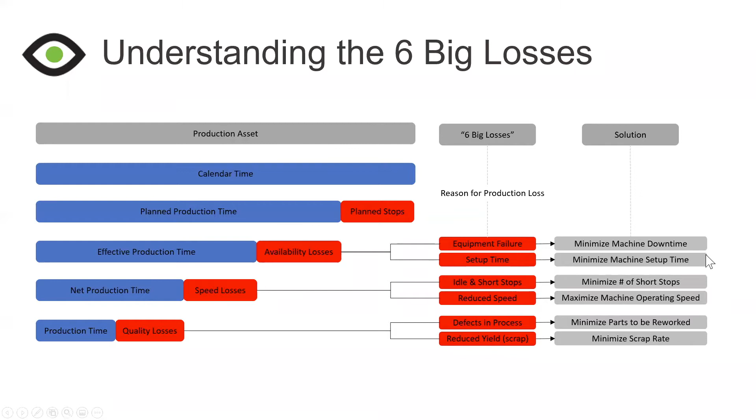And as we continue to analyze this from more of a 50,000 foot overview, the kind of natural solution here to these losses would be things like minimizing your machine downtime or minimizing those setup times. And how we're going to do this as it relates to Prophecy is really to focus on these. So as you'll see in a little bit when Ron starts giving this demo, Smart Factory has a very unique set of flexible features that are addressable and really can be tailored to meet your individual 6 big losses. You know, as this diagram generically shows, these are all relatively the same issue based on size, but that will not be the case, right? For some machines or some participants in this attendee webinar, these different diagrams and blocks might be weighted differently.

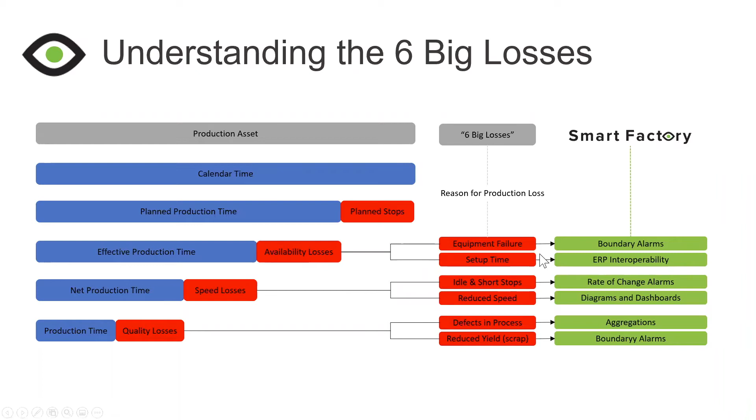And we're really going to explore how Smart Factory and the resulting features can be tailored to, once again, reduce these 6 big losses, driving all the way to the point where we're really trying to maximize that production time so we can maximize our revenue and margin, and at the end of the day, run a more efficient manufacturing process with our given tool set. So with that being said, I'm going to hand it over to Ron, and he's going to really connect the dots of how we can go from this framework of the 6 big losses and how Prophecy can be addressed and used to reduce these 6 big losses. So go ahead, Ron. Thanks, Ben.

Good afternoon, everyone. So we're going to start to drill this down a little. Obviously, those 6 big losses drive a lot of behavior and a lot of time and attention in every manufacturer that's here today. Through this journey to get to Smart Factory and how we can really start to mitigate those big 6 is obviously through this process of getting data collected in a real-time fashion, moving that data so that we can actually consume it and transform it, and then ultimately be able to use that for automation and information, for the ability to drill down and get to root cause analysis.

So along this journey, there's kind of three key areas that really get impacted through the solutions and through the process. Obviously, it's the machines. Obviously, being able to connect to the ecosystem of just the host of different machines that you'll have on the factory floor. Everything from robots to CNCs to lathes to boring machines, grinding machines, right? The list is pretty large, but that connection is going to be extremely important.

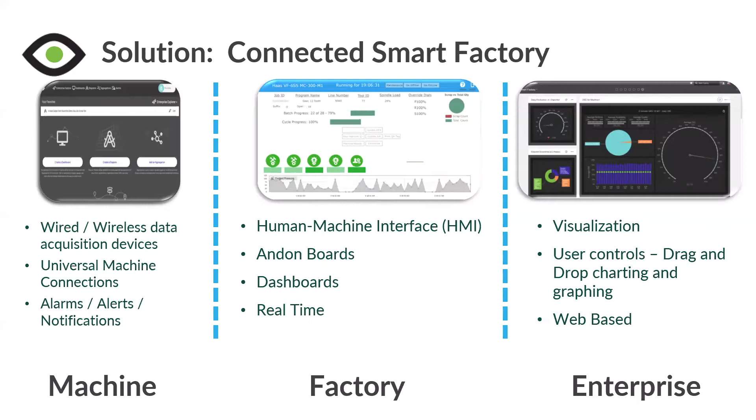So we're really going to just touch on these areas as we go through, because it's all part of the digital transformation journey that most companies are looking to go on today. They are trying to reduce costs, simplify the operations, simplify processes, especially when it comes to the shop floor. So the first part is really the machine piece.

If there's anyone on the call who has attempted to connect to some of their machines that are networked and have the ability to connect, the good news is you've attempted that. What we found in our experience is that's a very difficult thing to do. The good news is Smart Factory that's powered by Prophecy comes out of the box ready to connect to hundreds, if not thousands, of machines in those platforms.

These machines all speak different languages. They all have different security protocols. Some, Siemens et cetera, are very proprietary in nature. They're a little hard to get to, but our team's experienced in these various machine platforms and their complexity to be able to get them connected up.

And for those folks that may have some of the older machines, we've all seen these, from grinding machines to various CNCs that may not have network capability. Well, the good news is now with the advancement of smart edge devices, there is a way to get to the data that we seek. So we come out of the box with the ability to connect to a large variety of machines and machine platforms so that now we can start to securely normalize that data.

When I talk about normalizing the data, when you do get connected to the machine, if you're able to network to a platform, the good news is there's a lot of data available. The challenge is there's a lot of data available. The data was really created with the machine builder in mind. It wasn't really built for the concept of how we could utilize this to improve our machine downtime and get to the big six, if you will. It really wasn't designed around that concept.

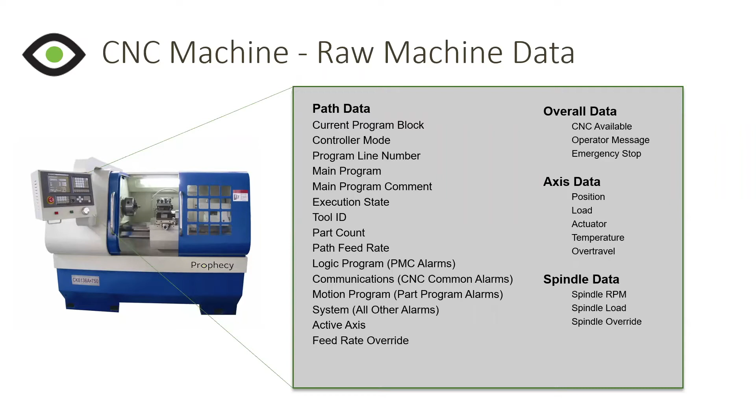Well, that's where Smart Factory comes in. So we take all this machine data and now we start to compartmentalize and normalize that machine data so we can really get to the value that it can provide us. There are elements on that machine that can help us with performance, maybe production, maybe predictive maintenance, a whole number of things. So the good news is that we normalize the connection.

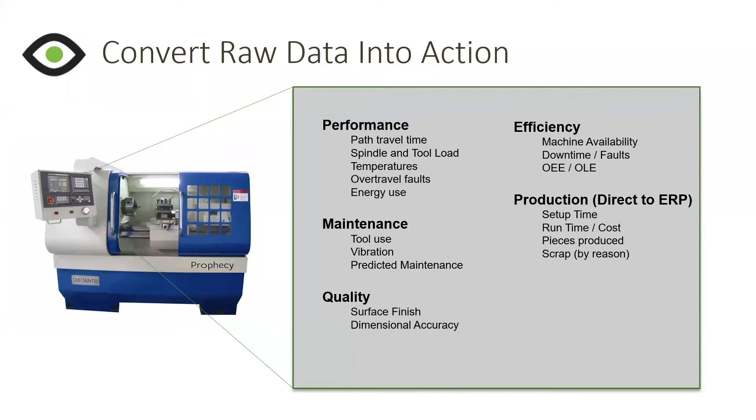We then start to silo off this data into the Smart Factory so we can use it throughout the process for a combination of automation, predictive maintenance, and really start to locate in on those big six losses, because there are a lot of data elements here that can help us along that journey. So obviously getting to that data is going to help, but we also have to supplement the data. And now I'm going to talk about that journey and what that means.

So to start that journey, there are really two paths that a lot of companies will take. The first path could be really simple. It's a very quick time-to-value path because it doesn't assume that we need to connect to any of the versions of SyteLine to be successful. And that path is focused on the asset or the machine. So in this focus, we get the connection to the machine. We set it up for alerts and monitoring. And then we have displays that allow the team to monitor that machine at a level that they haven't been able to do before.

Most companies will put out service or preventative maintenance, and they'll go do routine maintenance over periods of time, or they might be able to check some cycles or some cycle times, and thus maybe get a little smarter with preventative maintenance, but it's still a challenge. Well, once that machine is connected into the smart factory, those challenges go away.

Now we can really start to monitor and assess that machine in a real-time fashion to maybe get ahead of those predictive indicators that could tell us we're getting ready to have a break fix scenario and maybe make some scrap. So there's a lot of value in starting the journey just with getting the machines connected and starting to measure and monitor those machines in a real-time fashion.

Now, obviously, for a lot of companies, that's the start of the journey. That's not the end. As we've got our machines connected, we'd really like to talk about factory automation. Most of the solutions I mentioned earlier, and they're really good solutions, they've been around for a long time, Factory Track, Shop Track, and the like, are all forms of what's called manufacturing execution systems. Like I said, I've been working with Syteline close to 30 years. I've worked with a bunch of them.

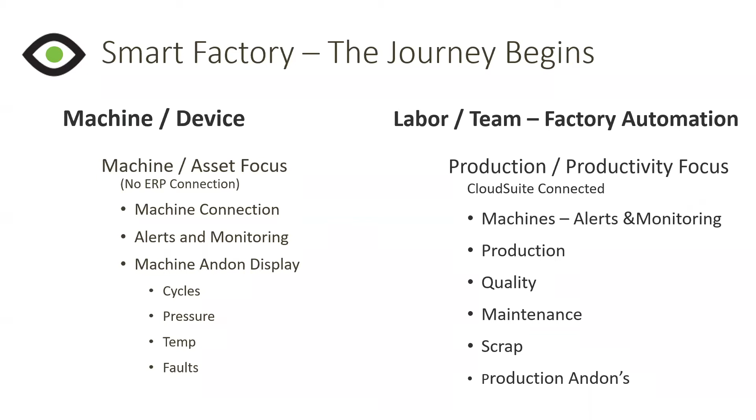Well, we can start to break that paradigm when the smart factory comes into play, because now when we get the machines connected with the operators in a real fashion, we can start to dynamically change how we automate the factory floor. The first part, as I talked about, was the connection. The alarms and notifications are a key part of the smart factory solution. These come ready and out of the box. There's no programming to do.

So if I'm setting up a CNC machine, maybe spindle rate's important, load's important, and maybe pressure's important. Those are three key monitoring points that we would set up and monitor in a real-time fashion, including if, for example, the pump pressure rate of change started to escalate too high or too low, then that may be a predictive indicator that we're about to have a problem. And that's where we can start to change things. No more do you wait for the break fix to happen.

We can now get out in front of that, send off the alarms, get the alerts to the appropriate individuals. Thus, we can take a preemptive measure to stop the machine from actually breaking and creating scrap and maybe a longer unplanned downtime. With this, we can also start to look at the number of cycles, idle times, and a number of things that the machine goes through in its daily life cycle that lead to the big six that Ben talked about. And we can help mitigate that just by providing this simple visibility, right?

So regardless of whether you would like to start with a simple program on a machine path or do it with a smart factory automation path, the alarms and notifications are going to be a key part of that journey. Visualization is also a very important part of the journey. As the alarms are getting set on the machines, maybe we would like to have displays in the maintenance area or in the machine or CNC group, so that the operators know the status of machines and where we may have issues, because a lot of times operators are a key part of the maintenance path for a lot of assets.

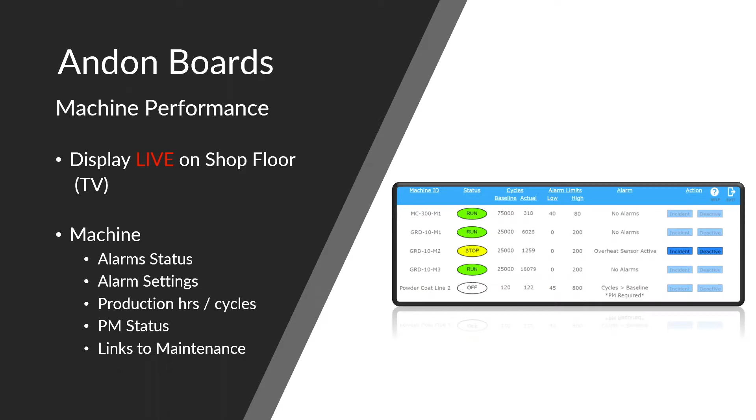So we have a concept within Smart Factory called andon boards. These are built off of the traditional Japanese word, where it's really about a visual management display that allows a team to effectively see where we have an issue or maybe a bottleneck. These can be run on any tablet like a Chromebook, or even on a TV. So you could put a little Raspberry Pi into an HD TV, run the link for the machine group andon board, and then everybody could see that display. These are all part of the smart factory layout and can be deployed throughout the factory floor.

As I mentioned on this journey, the assets and the connections, the visibility is going to be important, but also maybe changing the operator interaction from a traditional shop track or Factory Track log in and log out type of methodology to something that's more connected real time with the machine, in which we will automate a lot of activity in the background.

So an HMI, or a human machine interface, is really a combination of machine and Syteline information, maybe related to a job that we're manufacturing. And through the designer, you can build and deploy these according to the machine group or the machine class and what they would be doing.

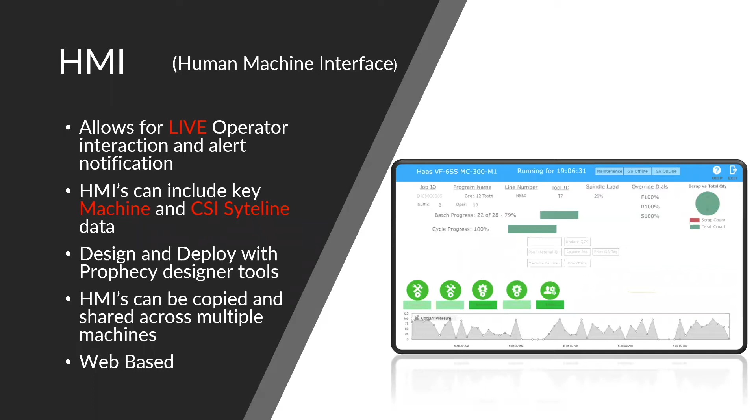Some companies may use jobs, some may be production schedules, some may be doing high volume repetitive. That could be just JIT and Kanban, and I'm making a part and I'm punching it out on a plastic injection mold machine, right? So a whole different variety of production methods, and thus HMIs can go and marry that production according to the level of depth that you want to go through. So these HMIs really connect the operator with the machine and the production that we're doing.

So now we can select a job. We can maybe do some production automation regarding transactions. We maybe want to interact with quality, because some companies require traceability in A&D and other places. So there's a whole lot of things that can now be automated that were traditionally either separate processes or very manual in nature, and sometimes could require a lot of operator interaction. So this is where it really gets to change.

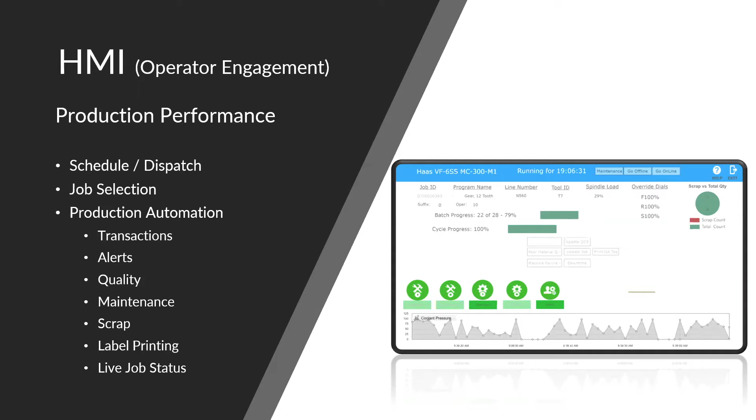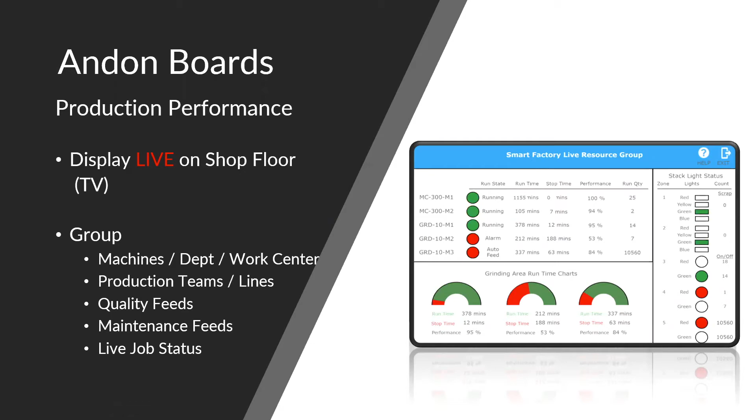And so then the visibility that we provide both to the operator, to the groups and the teams of where maybe we're looking at the CNC or the grinding group, what is their performance? How are they tracking? Are we ahead or behind? These are all possible in kind of the smart factory and the automation that we can provide.

From a deployment standpoint, we can provide a plug-in to Factory Track to enable Smart Factory. You can get access to Smart Factory just simply through the tools provided by the Prophecy platform. So we really try to make this easy. So it depends on your environment. Some companies have already invested into Factory Track. So this is an example of a plug-in that we would provide for Smart Factory into Factory Track.

And thus you could utilize all the power and capabilities within that ecosystem, still providing operators the ability to get the dispatch, view their drawings. And then we can look to really automate a lot of various activities within that environment. So whether you're running Factory Track, you're running data collection, or these other methods, we have a method in which we can embrace that method that you're using.

And then obviously protect that if you're looking to move forward, to move into the cloud, because we provide solutions for both on-prem as well as folks in the cloud. We've worked with both. And the example I'll do here in a moment just kind of solidifies this and brings it all together.

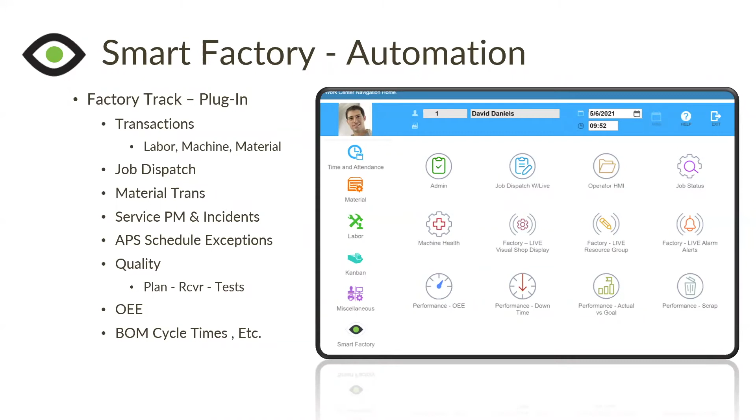Obviously, the display of information could be also in a number of different ways. We have dashboards that drop directly into the V10 environment, so that you can have like a smart factory dashboard that gives you all the OEE and the daily production and downtime reasons, scrap, etc. Because we know the visualization of this information from a real-time perspective is going to be important. And it's part of the journey.

That's part of the root cause analysis, being able to really do the analysis of maybe what's driving the big six losses. And there, by giving definition to it, we get the root cause, and then we can start to get a game plan of how we effectively can start to reduce it or mitigate it.

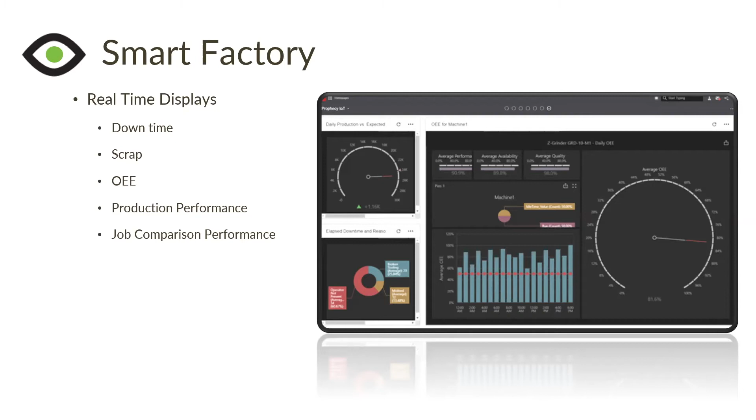So with that, I'm going to do a quick example, but first let me set this up so everyone knows what they're looking at. I am going to be manufacturing a job within Cloud Suite. In this job that I'm going to be manufacturing, I have a part. Behind that is a certain spec. And in that part, I have production. I'm going to have to deal with quality. I'm going to also, within the process, have scrap that occurs.

And as the real world is always throwing us monkey wrenches, I'm going to have to deal with maybe some maintenance and some unforeseen challenges. So that's kind of the environment. And so I'm going to have an operator that'll have a tablet, and he'll be running just a little web page for the smart factory on that tablet. And then thus he's going to be connected to this ecosystem that allows us to not only execute this job, but then be able to automate a lot of the activity around that work order.

So let me get my application over here so we can see this. So everyone should see that I have my Infor Syteline system up, and in this system I've got my smart factory here. Oops, let me go turn that guy off. I have a web page that runs interactively there.

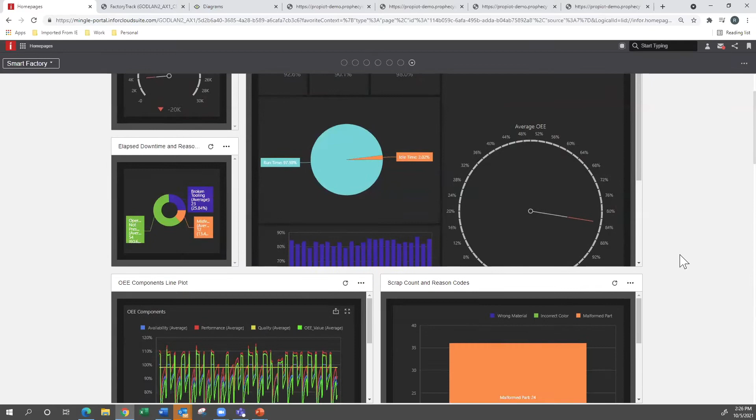So in here I have my environment, my smart factory homepage, and I just had to re-log in and authenticate here. But we can see that this is running within the version 10 environment within Cloud Suite Industrial. So I can see that I have everything to be able to view my smart factory, maybe my OEE, I have elapsed time and scrap, maybe I'm seeing some temperatures off my machines, doing some various analysis, if you will, and the ability to come in to get at this data, to be able to look down and filter by machine.

This is all part of the ecosystem that Smart Factory enables, including the visualization of my alarm panels. As we talked about earlier, being able to set the alarms, I can see I have alarms here set for some feed percentages, spindle speeds. I can see that I have pump pressure, and that one's a rate of change that we talked about. So if my pump pressure starts to move in a direction at a certain rate, then that's going to key off alarms that would key my team in that we have an issue and we can get out in front of it.

So this ecosystem is all powered by Smart Factory and plugs into my Syteline environment, both in the cloud and on premise. And as I mentioned, I can also deploy this via Factory Track. So this is the Smart Factory plugin to Factory Track. And see here, I have the ability to go see job dispatch or my operator HMI. And so this is really the area that we're going to look at: I've got machines that are connected up, and I've got operators that are doing work. So I'm going to launch my operator HMI.

And so this HMI is where the operator would really come in. Hang on one second. Let me get my panel up. It didn't refresh earlier, so sorry. Sometimes it sits too long and I've got to get it refreshed. So from Factory Track, I'll be able to launch these key areas of Smart Factory. And one is I've got an operator that's going to be making parts. Let me change that one.

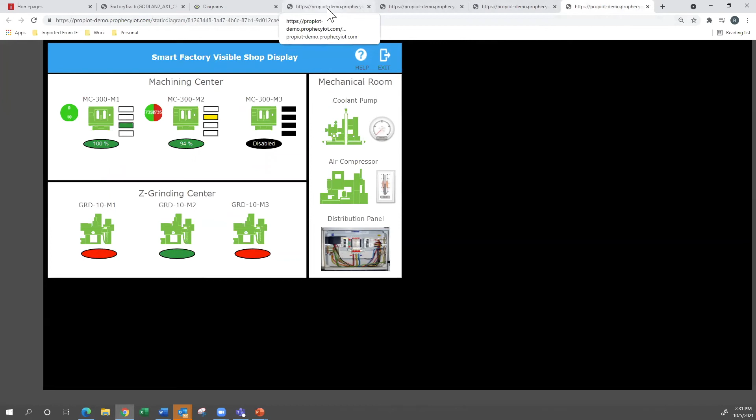Even my shop view display that may have all my assets across my shop floor showing what's running and what's not. It's showing I've got 10 parts made and I'm looking at 100%, and I'm part of the MC300M1. So that's the group that I'm in. So all these displays are dynamically connected, from the operator and the work he's doing to the team to the whole plant floor. Everyone has visibility.

So now here I have a chance to now do another scan. And as the real world will throw us little curveballs, that scan of 23 is outside of tolerance. So we have built this HMI in this example to deal with a lot of different things. In the real world, would you have all this going on? Probably not. But today is to kind of demonstrate to the group kind of what is possible.

So here we've decided that it's important to allow the operator to know this is outside of tolerance, and to give him a chance maybe to do something with a quality hold tag, to where maybe that's barcoded, it could be printed so the part can get isolated. But he can also give us, through a button click or like a drop down, some things. Maybe he's noticing the pump pressure is a little off, and thus he's saying, I think I have a machine issue. So then we'll update the job, we'll print the QA tag, the operator is back to making parts.

But notice now we have over here, our alarms are still good, but notice I have made a piece of scrap related to my team Andon. So everybody knows that now, obviously our productivity is going to get impacted by that. And so we're coming up on the next one to where, let's say also we have another one that I get sort of a bad measurement. I'll also say this is an equipment issue, and we're going to update and print the QA tag.

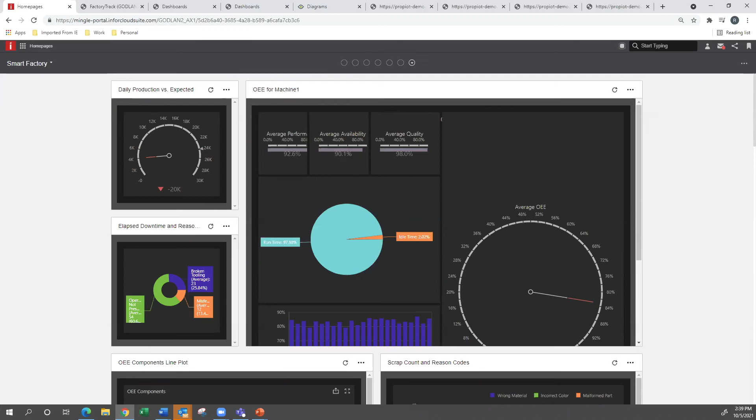There again, we want to get back to those 6 big losses, and this platform enables companies to really start that journey. All this being obviously within the ecosystem of Syteline. This is one that we try to make it as easy as possible for companies to start this journey. So with that, let's transition over to how companies really make this happen.

One of the things that's unique versus maybe some of the other platforms that are out there in this smart factory IoT arena is that we created Prophecy with a toolkit. So think of this much like Mongoose is the toolkit for Syteline to allow customers to really personalize and build out what makes them unique. Well, we created the same toolkit within Prophecy that enables all that smart factory uniqueness. Graphical drag and drop, very visual, combined Syteline with the ERP data.

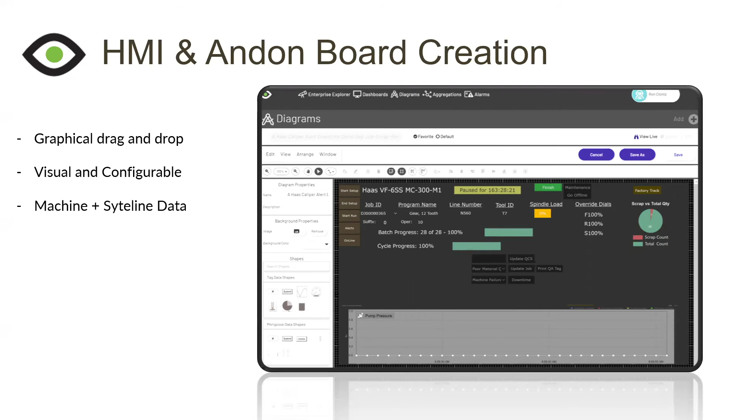So, just as a side note, this can talk to other applications and platforms. So if you had an environment where so many of the plants were on Syteline, but maybe some other plants were on another ERP, I don't really know why, because Syteline's the best, but say they were, you could still use Prophecy as a single application for Smart Factory across all those platforms. But we did build in the Mongoose and the API REST control so that you could dynamically talk on-prem as well as the cloud, and we can really connect to all the versions of Syteline.

So this enables you to really dial it into the type of manufacturing you're doing. So today, obviously, that was like a CNC example, but let's say you had a plastic injection mold machine and you were having a 2-cavity mold, you've got temperatures, you've got ranges, you've got pressure. It could be a different type of manufacturing process, maybe you're running a co-product job because one mold is going to pump out 3 different parts or a single part, and it may do that for 24 hours. Well, that HMI experience would be quite different than the CNC. That's the beauty of the toolkit, now we can dial that into the type of manufacturing you're doing so that it's not a one size fits all.

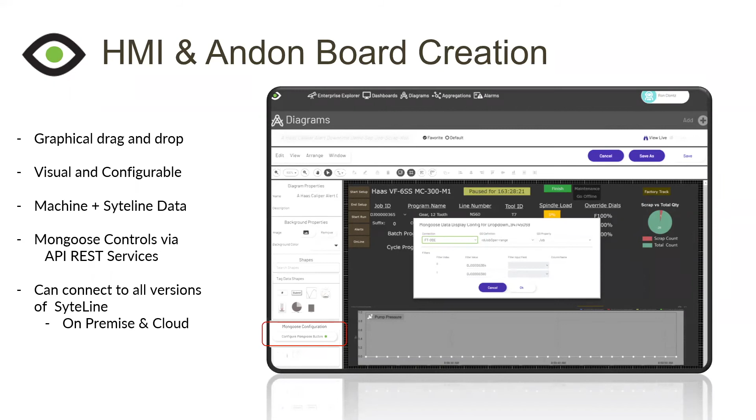In addition, we have the data accumulation and creation engine within Prophecy that allows us to do web and HTTP pushes, APIs, send it to other systems. We can talk to other maintenance packages. We can talk to other analytics platforms. This also helps us send it into Data Lake, for example, because we might want to use the powerful tools of Birst to do a lot of the analysis as well. So a lot of different capabilities there that are built and brought out of the box by this platform.

Here's an example of how I basically built the Smart Factory dashboard that was in Mingle that we saw. It's nothing more than directed URLs. We give you that throughout Prophecy so you can run them and build them within your ecosystem just as simple URLs. So there I wanted the extruder temperature to be shown up top. I get the directed URL, I put that in Mingle, I publish the page, and now everyone has access to that information coming in real time.

So as you start your journey, you've got all types of equipment. Some may be older, for which you may need some edge devices. Our team is very well versed in helping companies assess their situation and then look at things like some of these wireless edge devices, cameras. We did one little test project where we were monitoring the stack lights on the top of a CNC machine. And then we built dashboards off of the video camera monitoring the stack lights. That was very unobtrusive because the camera was several feet away. That was using a little Raspberry Pi and a video device to monitor the stack lights. But we got a lot of rich data just from that very simple connection.

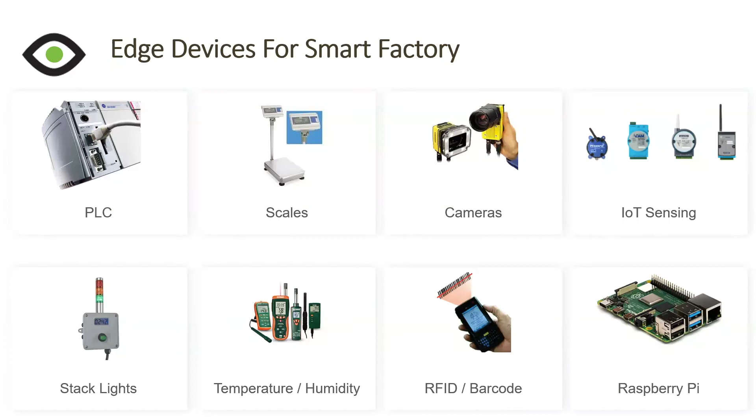One of the early customers that we worked with on their journey started out with IoT as one of their key strategic initiatives for their corporation. These folks make some of the, if not the best glass cooktops in the entire world. You've probably seen them. They're maybe on your counter, your cooktop at home. It's got a little Circle K in the corner. Well, you know that glass cooktop is manufactured by Eurokera.

They have a very advanced manufacturing facility, and they came to us with a real problem, and they had attempted to do a lot of the connections to the machines themselves. They were looking for a platform. And I guess we were at the right time at the right place. Today, they have standardized on the Prophecy and Smart Factory platform. And now today they're building their own HMIs, they're doing their own andons, and they're interacting with Sightline in very new and inventive ways.

Like a lot of companies, they have a lot of different types of equipment, from lines to individual machines to robots, etc. And they're continuing to find new and inventive ways to help automate and turn that data into things that they can take action on. They were one of our early customers, and they are well on their way to really doing their own thing. I'm very excited about the things that are happening at Eurokera.